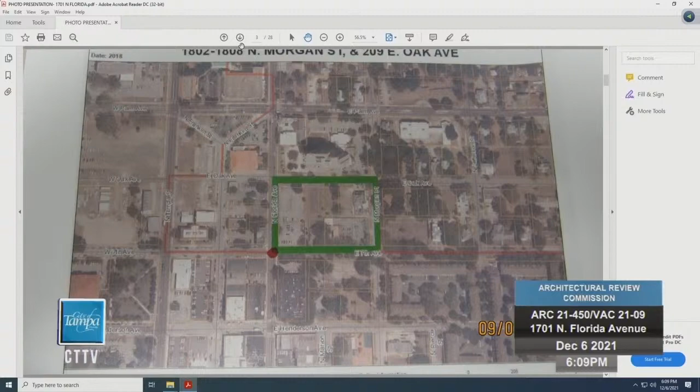I wanted to go to the surface of the alleys. There are some conditions associated when we get to the motion, that if it's a favorable motion, some of the historic material stays behind. So you see the granite curbing that flanks the alley, and you see the historic brick.

Just looking at the alley in different segments, some of it has not been kept as much as others, but the historical brick is there in parts, and then there's asphalt.

Bricks are protected by ordinance through City Council, and there's a provision I've stated in Chapter 22.305 that if the alley is to be vacated, the historic materials be returned to the City of Tampa.

At this time, that concludes the photo presentation and my introduction. These pictures will be here if you need to reference them anymore, and I believe the agent could address the board at this time.

Thank you, Ron. Good evening, everyone. My name is Tyler Hudson. My address is 400 North Ashley Drive, and I'm here on behalf of the applicant. Given the cause of this being continued as a tie vote, I'm very happy to see an odd number of you here this evening. I'm going to be extremely brief in this presentation.

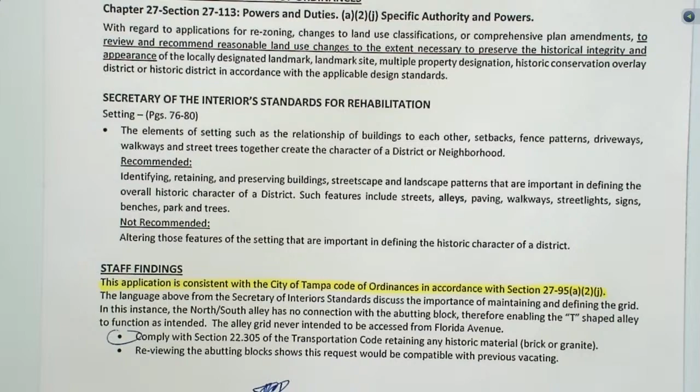Chapter 22, which is outside of the Land Development Code, is a transportation technical standard that has a process in place for bricks. On behalf of the applicant, in connection with any certificate of appropriateness that might come back to you for new construction on this property, we want to use as much of the bricks as possible. It's not totally up to us—it has to go through the process where they'd be removed, palletized, and given to the city, but it is our intent from a design perspective to use those as much as possible.

I would also note, let me get a better depiction. If you see the number 2 at 207 East Oak Avenue, there's an asphalt area there. The applicant is under contract with the City of Tampa to acquire that parcel. That contract has been approved by the Tampa City Council, and with that they are either under contract or have acquired the entire block. So that's part of the reason, given that there is unified—pending or existing—site control, to have the T-shaped alley vacated.

Last point—you see the red arrow, that's the block in question. The block immediately to the south, the Salvation Army office building on the right side of Florida Avenue as you drive north, had a similar T-shaped alley, really an identical configuration.

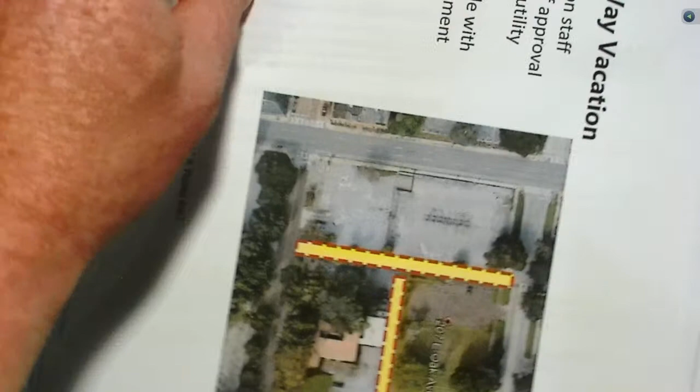I'm not sure that's actually what you intend for us to see. The one you had? No, the one you had on top. There you go. Yes, thank you. You wanted us to see the red lines, right? The red lines and the dotted yellow lines and arrow, so yes—a little bit more than I can do on screen.

But just for precedent value, again the southerly adjacent lot, the Salvation Army office building, is not in the historic district. Our parcel is on the actual border, but I'm just providing that for a fuller sense of context. I appreciate your time reviewing this presentation a second time, and I'm happy to answer any questions.

Thank you. Thank you.

Commissioners, Ron Vila, staff with Historic Preservation, to provide you guidance on the applicable standards you'll review this request with. This is Chapter 27-113, your duties and powers, subsection A-2-J, regarding applications for rezoning, land use change classifications, or comprehensive plan amendments: to review and recommend reasonable land use changes to the extent necessary to preserve historic integrity and appearance.

In reviewing the application, the immediate vicinity has been altered in a negative way, and the alleys cannot be brought back. This continuation of the alley does not provide a viable economic engine to move forward. Staff's findings are that this application is consistent with the Tampa City Code of Ordinances.

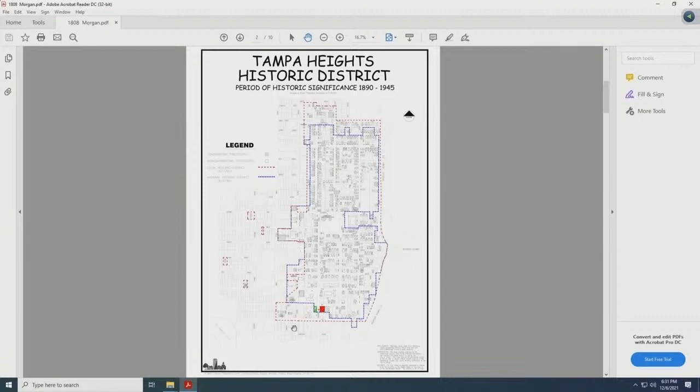The contributing structure making the site subject to the PD, or the move to the PD. Just a couple of different illustrations showing the same point, just to focus on the structure itself.

This is the front elevation, which is the north elevation. This is the east elevation and the front elevation, showing how they're addressing the accessibility at this time. This is looking at the front elevation, which is the north and western facade.

And moving around to the rear, and some different accessibility issues to meet code. This just shows the posting at the receiving site. So that concludes the photo presentation at this time.

Mr. Madsen can address the board.

Good evening. My name is Harvey Schonbrun, and I am the owner of 1808 North Morgan, where the building is now, as well as 301 East Oak, where we would like to move the building to. I just wanted to introduce myself to you and let you know that I am not an interloper. My history in this block, in this neighborhood, goes back 74 years, when I was born at the old St. Joe's Hospital across the street. And then when I was a little boy, my office building, not this building, but my office building at 1802 North Morgan, was my pediatrician's office, Dr. Philip Adler.

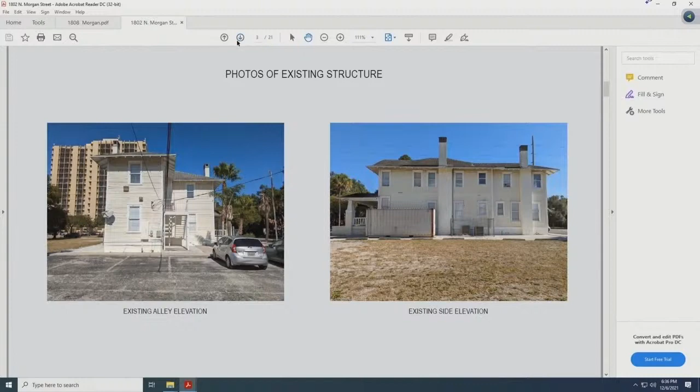Again, the existing alley elevation and the existing side elevation. That would be the side that, on your right, would now be facing Morgan if we kept the orientation the same. The relocation site is the Oak Avenue site. So in this aerial, that's the current location, and as you can see, it's the only house left on the block. We're proposing to relocate it just directly across the street to Oak Avenue, to this site.

The proposed development is not by us, so our group doesn't have any control of that existing development, but if the development does go through, this is the only structure that will be left in place, and we felt it would be an inappropriate scale for that location to remain there. Plus, as Harvey mentioned, he wants to be maintained in the neighborhood. He wants to preserve the house, so we feel it's best if we relocate it, and that he could occupy that space as his personal law offices in the neighborhood.

So this is kind of the orientation. We've taken the house, and the only exterior modifications we're going to do are ADA improvements to it. So as you saw, we're taking the house in one direction, and as we swing it over, we're going to rotate it 180 degrees.

So part of the rezoning, the PD, and the ARC application is that the receiving site is RM24, which does not allow for law offices. So we're asking for the PD to allow the client to occupy it as a law office, which the current facility is. The 1808 Morgan Street address is a PD and it is approved and actually used as a law office. So as we relocate the building, we want to bring that same use over to the new facility, or the new address.

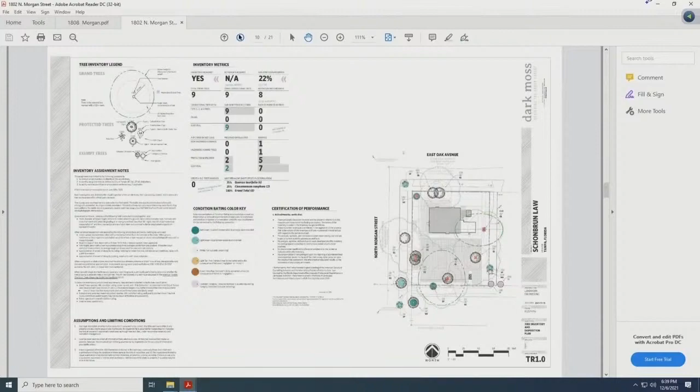And we're preserving as many trees on the site as possible. These are just some of the variations we've tried, just to give perspective on how we came up with the orientation and the pitfalls or problems with other orientations.

This was an example, one of the first ones, where we took the orientation of the building and just slid it over. As you can clearly see, at the corner, the intersection of Oak and Morgan, the building is no longer facing it. So the historic corner facade is not how it would be. We talked about having to build a porch to wrap around to make a new orientation, and it just didn't seem to fit.

With that orientation, it really limits our parking. We'd have to use the alley, and we just didn't get enough parking spaces. So we tried a couple of variations, moving the building forward, still not getting enough space for parking. Again, the biggest problem is the orientation, that the historic corner facade is just not facing the corner of East Oak Avenue and Morgan Street.

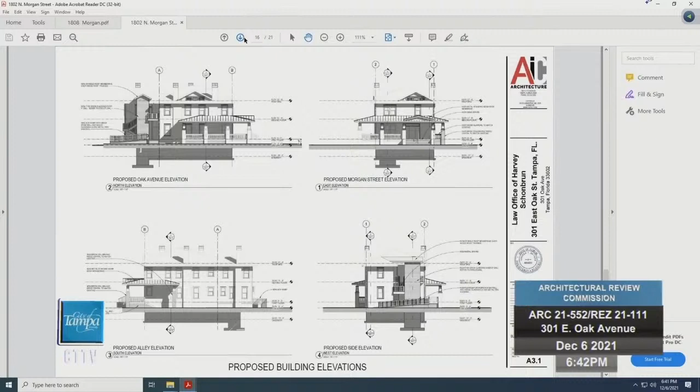I understand from the staff reports that the improvements to the site will have to be done under a separate ARC. But just so you know, we're proposing an elevator, an ADA ramp, and redoing the stairs for egress purposes.

These are the renderings we've done, and we've included the new development, which has already been approved. It's the Victorian townhomes on the back side of the alley, on 7th Avenue, which are 4-story townhomes. So our site, 301 Oak, we're trying to maintain the historic structure of it.

So this would be the new Oak Avenue elevation, which was the current Morgan Street elevation. This is the Morgan Street side—oh no, sorry, that's Oak Avenue. That's the corner intersection of it.

This is along Oak Avenue, looking at the elevator and the proposed ADA ramp. Part of it was that the original ADA access was in the front, on the porch. We didn't feel like that was appropriate, so we're trying to redesign it so that it's accessible, but not the first thing you see.

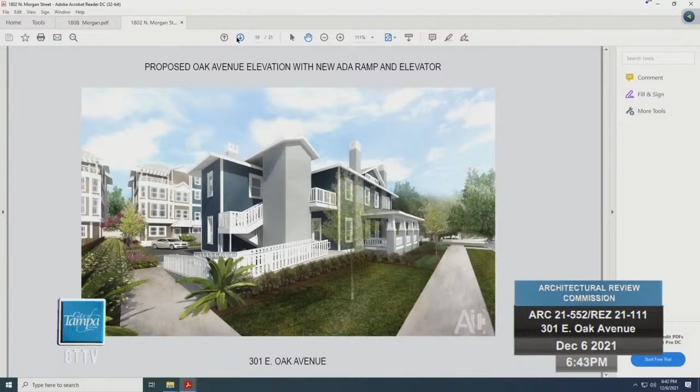And then the proposed interior of the parking. So that's again the townhouses to the south on 7th Avenue, and our proposed redevelopment of the site.

That's just the interior of where the ADA ramp is. We're proposing to keep all the materials the same, so the brick where we had vertical elements such as the fireplaces. But again, that's a separate ARC. So, that's it.

So at this time, I'd ask the agent if that concludes your joint presentation for the recommendation for the rezoning. Yes, so the rezoning is just because they work together. I want to reiterate, the relocation of the house is one, but the rezoning, they work together, so you have to have both at the same time. I even think in the report, the rezoning report says the relocation must come first before the ARC, or for the rezoning application.

So you've addressed every point that you needed to address for both? Yeah, you want me? I could go through each waiver if you want to go through the waiver applications for the REZ, but I mean they're very... Yes, typically we expect that to be, yeah. No problem. So there's 5 waivers for the application. Put the site plan up? For the site plan, yeah, yes. Put the site plan.

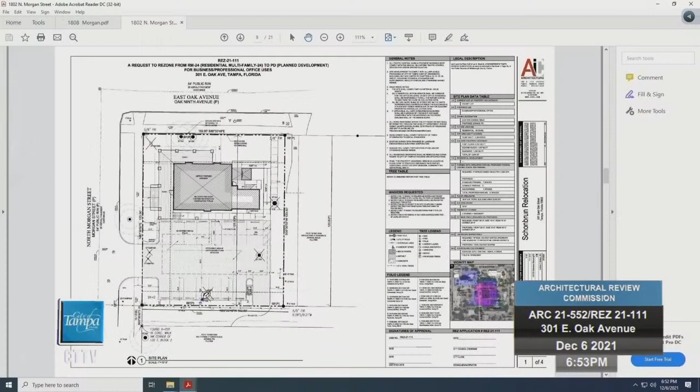So it's a C8? Yeah, so C9 is preservation, C8 is deemed hazardous, so he wanted it removed, because it was... I think we're talking about different trees. Which one, you're talking about this one right here? Number 2, it is tree number 2 on the south property line. Yeah, that's the one. That says it's a C9, in good shape with low failure potential.

That's what I would have to go with - I'm willing to save that tree, but that was not consistent with what he had instructed us, and that's why it was being removed. I'm happy to save the tree and reduce the parking, because the required parking is 17 spaces. That's not what the client actually needs, but that's just the city guidelines. When we spoke with the arborist - sorry, number 2, if you look at the report, is the hazardous laurel oak in fair condition. I might be reading it wrong, but that's on his second page. There's the number of grand trees: tree number 14, non-hazardous, and tree number 2, 33-inch hazardous. And that's why he's recommended to remove it.

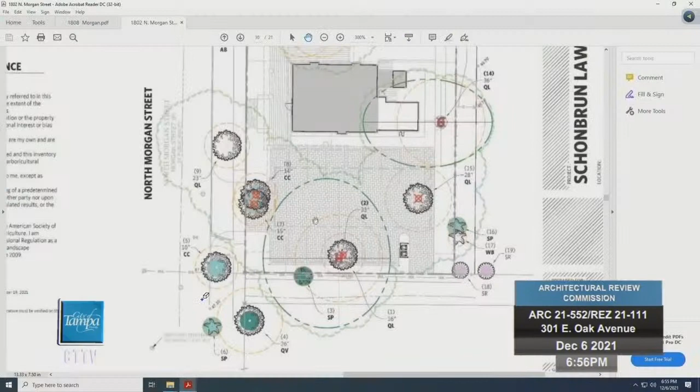Okay, so this tree is tree number 2. On page 2 of the report, that tree is the 33-inch hazardous oak. He calls it fair condition, but it has a hazardous rating of C9.

If the tree was in better condition we'd preserve it. That was a specific question we had with the arborist, because when we talked to the Civic Association, they asked us to preserve as many trees as possible, and we're willing to. But when we directly asked the arborist, his recommendation was that it's a hazardous tree and should be removed.

So to clarify, tree number 14 is the one deemed non-hazardous and could be saved. It could be saved, yeah, and that's part of the waiver. When we asked about that, his report said because of the foundations and close proximity, he didn't think the long-term longevity of the tree would be sustainable.

Again, it's based on the shape of the tree. He was okay with its removal as long as we pay into the tree fund. We prefer to save as many trees as possible, but relocating and then destroying it just didn't seem like a good idea. Thank you for your explanation, I understand the difference. I'm sorry about the confusion.

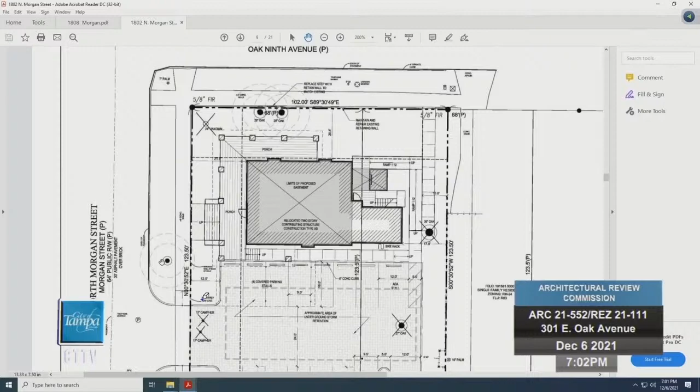That's it for me on the zoning in terms of questions. Any other questions regarding the rezoning request? Can staff tell us what the zonings are of the abutting properties?

Yeah, I could tell you that. Do you want around the perimeter, just the abutting properties? Because I've listed them on my site plan. I'm actually more concerned with the block you're moving to.

So the block that we're moving to, Site K, which is the townhouses, that's a PD. Site G is an RM24 zoning, and F is also, I believe, RM24 — those are the two adjacent parcels. Across the street on Oak, B and C, those two are actually commercial properties, CN zonings, so we'll be in line with commercial. B, C, and D are actually office PDs, so they'll match — when we move, our zoning will match the street across the way, just across Oak Avenue.

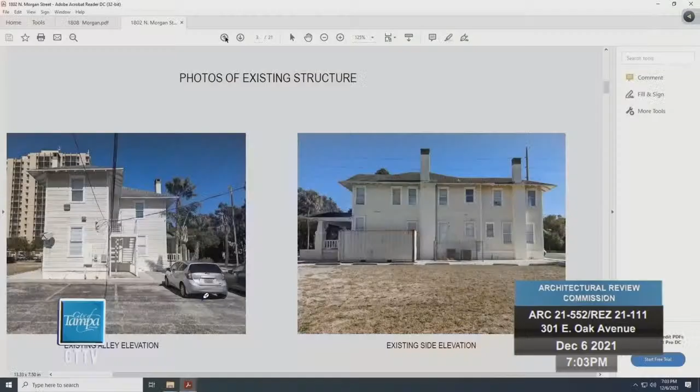Do you have any plans for signage on the site? There was a small monument sign that was part of the existing setup, and that's about the same scale of what we would be proposing. I'll go back and show you — there it is. So that's the existing signage, and I don't think we're going to have anything larger than that for the signage.

But where on the site would it be? It would be actually across the way on Morgan, because that's the front entrance. Can you indicate on your site plan? Yep, it would be right here. And it's exactly the opposite side on Morgan currently.

Any other questions for the applicant or staff regarding the rezoning request? One more question in regards to the tree replacement, paying into the fund — were any options looked at for actually adding in trees to the landscape?

What we've done is have it laser measured - these are the lines, the low voltage cable and distribution lines, and the TECO lines we'll have to relocate. We're negotiating with TECO to get a cost to move it underground from pole to pole. Not that complicated. That line is the transmission line.

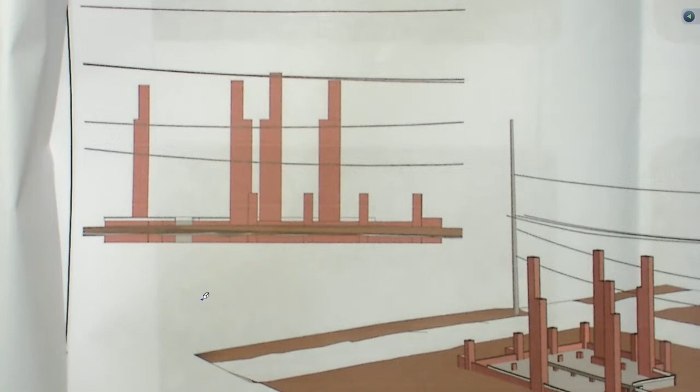Can you zoom out a little bit? We can't see all of that. That top line up on the very top is actually just part of the page. This line is the bottom line - there are 3 phases of power that come across, and the bottom line is the bottom phase.

In discussion, the laser measurers measured the highest point, which is the fireplaces on the house, so that's why those are represented like that. The house is only going to get lifted up about a foot to 18 inches. There are some curbs on the receiving site too - granite curbs, a sidewalk, and an 8-inch retaining wall - so we just have to lift the house up just enough to get it over to the site.

It shouldn't be that complicated because it's sitting 2'8" above grade right now, and when we land it, it'll be sitting 3'4" above grade - about 8 inches of difference from the original. So the character of the house when we relocate it will be almost the same, going from a 2'8" foundation to a 3'4" foundation. We had them measure it, and I'm going to rotate it.

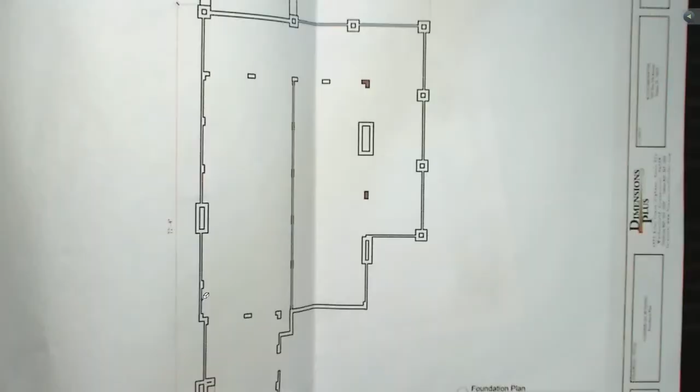So this is the stair foundation. This piece is the porch support, and the house are sitting on these piers. The indication of the red is where the laser couldn't actually find it, so those are actually just based on surrounding footers where they think it is.

When we get the house up, we'll actually know exactly where it is to relocate it. And again, the basement will follow this rectangle, and that's where the house will then sit on top of that particular foundation. We'll rebuild the foundation brick to match the brick where it was brick, and then the siding in the house we're going to restore. There's some, again, that's a separate ARC. There's a lot of water damage and termite damage that we have to repair.

So could you go through the points under the burden of proof that you attached to the material that we have in front of us? Yeah, so there's...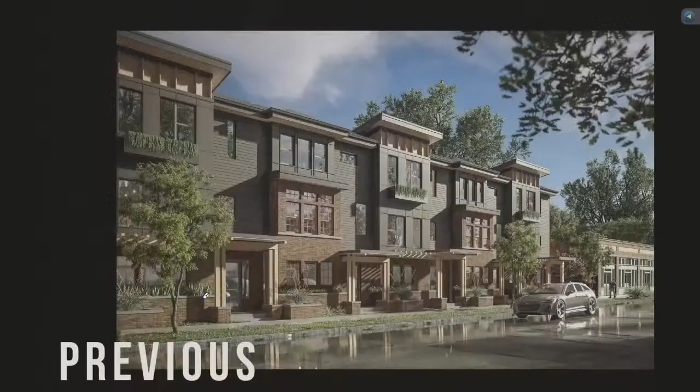Thank you, Commissioners, for your time this evening. I'd like to run through and provide a refresher, distilling our interpretation of the comments from our previous recommendation for rezoning. We touched on a few things that are relevant to the certificate of appropriateness approval.

Here we have the previous elevation along Oak. One of the issues was the setbacks at the porch level specifically, and also on this rendering, which is even further back, but we incorporated more front porches into the Oak elevation. We've also stepped back the entry facade and building envelope at both the first and second levels, and modified the roof line so it steps down more softly towards the rest of the neighborhood.

Here you can see the current elevation as it's been adjusted. We've incorporated a secondary sloped roof between the second and third levels to better reference and be in keeping with the 2- and 3-story structures adjacent along Oak and in the surrounding neighborhood.

You can see here we've got 3 porches; previously we were proposing 2. We thought the neighborhood association and adjacent property owners were really interested in that pedestrian-level engagement, so we tried to modify our unit splits to accommodate more porch area.

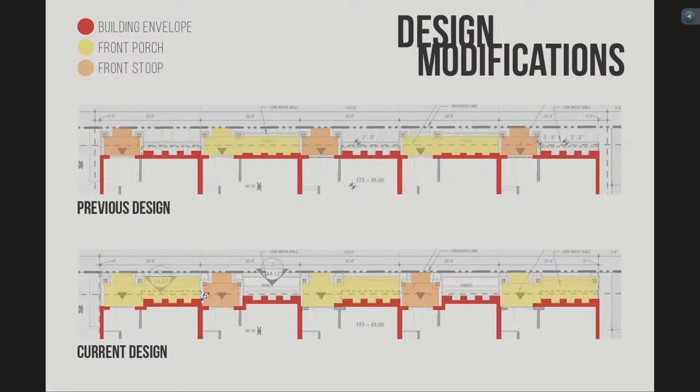Zooming in on the two different unit types along Oak, previous design at top, current at bottom: it was previously a 6'2" setback from the property line to the entrance and building envelope, with two total porches of 85 square feet each, for 170 total square feet of porch area.

With the current design, we've increased that setback to almost 8 feet at the entry and 7'4" at the envelope. With three porches, increasing the setback allowed porch size to grow to 107 square feet each, totaling 321 square feet of porch area along Oak, an 88% increase compared to our previous submission.

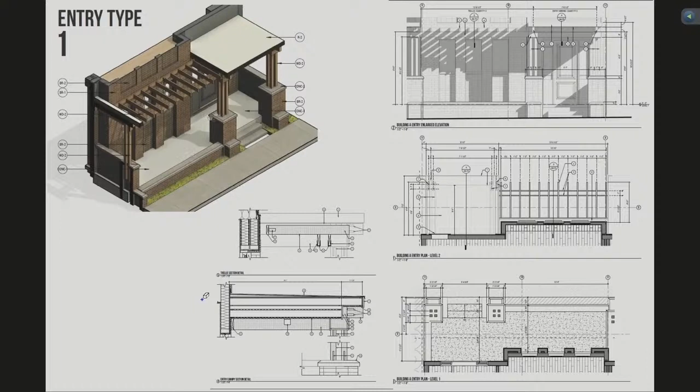More diagrams on those two types of entries: we have porches and non-porches. Where there would be a porch, we instead have a planter to allow for different unit types and a bit more green space along Oak. Here's that second type.

We can go back to see the different efforts made to adjust the setback at the second level and first level, then cap it with this sloped roof. This top roof was created as a mansard-type roof, but we increased the pitch to 12-12 so that from the elevation view you can understand it's a sloped roof, which also brings the soffit line down a bit more and helps it relate to the adjacent buildings.

Let's see the modified elevations.

We think this extra space at both the first and second level not only allows for a softer meeting with the pedestrian level, but also provides better facade undulation across the elevation, breaking up the mass even further than we had previously.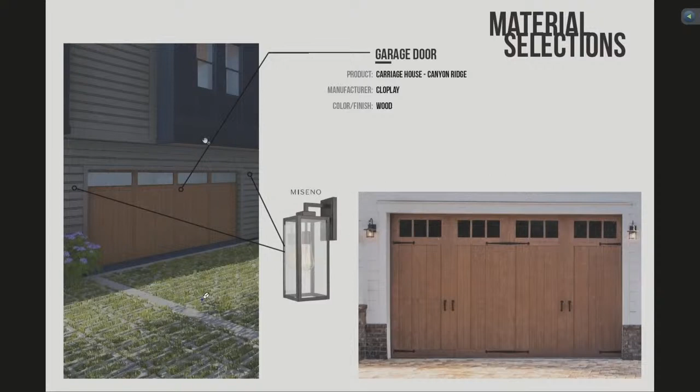In this interior motor court that we're proposing between the two buildings, we're looking at a turf block—an Aquastorm turf block with a gray finish and the ability to grow in the interstitial space. Throughout that entire motor court, we're currently sizing that for underground stormwater storage vaults. It looks like it's going to be pretty much the entire motor court housing these vaults, but this will be a good way to allow excess rain or water to percolate more quickly through.

So as we look at the three-dimensional view, this is looking west down Oak. We can see the currently unimproved alley that we will be improving. The motor court entrance is beyond.

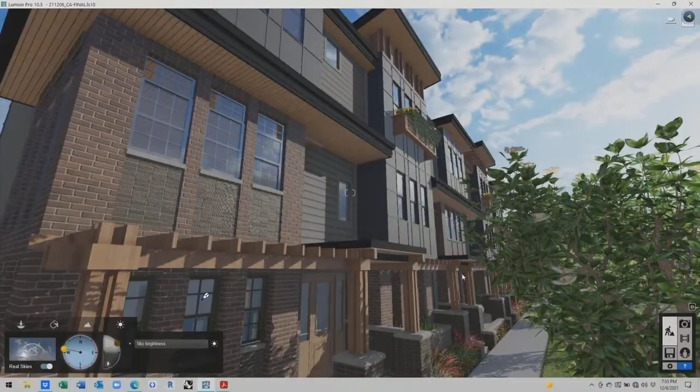We think that, especially from the pedestrian experience, having the facade step back particularly at the entrances on the first and second level allows for quite a bit of facade undulation, breaking it up into multiple unit types rather than one continuous building.

Here we can see the front porches along Oak, with landscaping and planter boxes every other unit.

Here we can see the building in relationship to the contributing structure to the west, and the softening of this roof line at both the second and third level, which we feel is an improvement from our previous proposal.

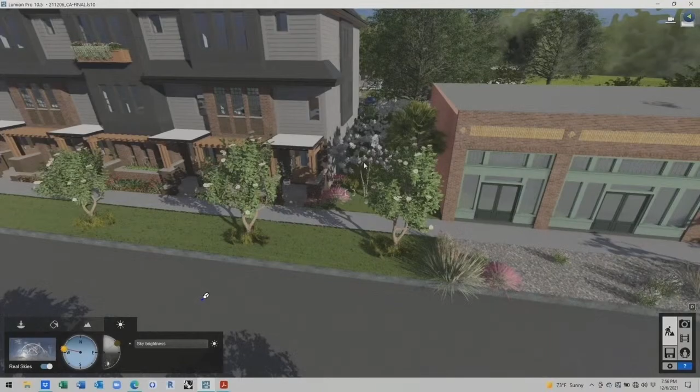We do have some landscape plan for this interstitial space between the two properties, along with, as Josh mentioned, 6 magnolias going along the right-of-way here.

As we move forward through the alley, we have a 15-foot alley on this side. However, there's a requirement for 20-foot fire access, so we have a Miami curb here and a pedestrian walkway, which is sufficient for the fire department to access the units.

As we come around into the motor court area, you can see we're planning on having this feel more like its own cul-de-sac and a private area for use when not occupied by vehicles. Rather than having the 2 units face away from one another, we can create an amenity of sorts along with mitigating the stormwater as much as possible.

Let's go up—each unit will have its own condensing unit on top, centrally located as much as possible so as not to be visible from the street level.

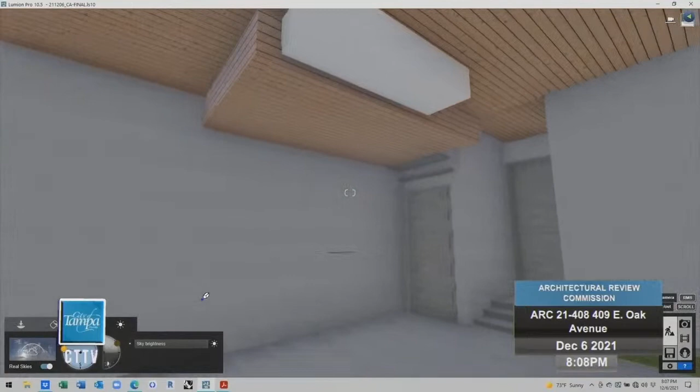Does this program go all the way around to the backside? It does. I don't know how much elevation, how developed we've made the model to that point. It's the only elevation you didn't show us, so I was just curious.

Let's see if we can get over there. We don't believe we put landscape back there. We actually discussed in the prior hearing that there weren't a lot of resolved elevations for the rear components, so it would be great to see those.

It's similar in aesthetic as this building. We have slight little landscape that needs to be applied here, but we're using the similar materiality and facade articulation as we are in the rest of the project, along with modifying the roof types and continuing this greater sloped mansard roof around the corners.

So I actually do have a question about your roof slopes. Why the 12 and 12? I understand the view, but what got you to the 12 and 12? Because it's a dramatic shift from the slope you had before.

The intent was to have the perceived roof line be dropped down specifically at the edges and the corners in order to create habitable living space. However, we weren't able to have a lower sloped roof. We thought this would be a little bit more in keeping with the surrounding neighborhood and existing hip and gabled roof structures. So you're actually using the lower components of that slope to give you the head height in the occupied space? Yes.

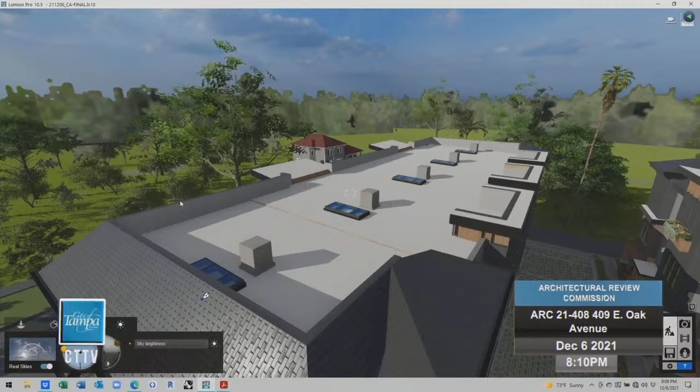What's your current parapet height? 37'2" above grade. No, but what is your parapet from the roof slab, at the roof deck? At the front, I could guess at it, or I could look at a drawing. I'm guessing it's probably 3'2". Okay, less than 5, more than 2.5.

Have you sized your condensing units yet? We have not. We have not gotten to the energy calc phase yet.

Can you show that roof plan again, or just go to that view in the model again? Based on the size of these units, they're probably gonna be somewhere around 3.5 ton. Yeah, not very big.

Going back to the roof slopes, what got you to the reverse slope on the projections? They're just kind of an oddity. I think it's about differentiation and creating separate unit types and feels along the facade.

It gets a little bit staccato and repetitive in nature if we were to maintain the same aesthetic. I think that if it were a simple parapet here, if we forego having sloped roofs all the way across and just do a simple parapet, that's out of the aesthetic of that craftsman style. So we wanted to give it at least a small soffit, but just a slight slope to drain back to the roof, and hopefully give it some extra intrigue along the elevation.

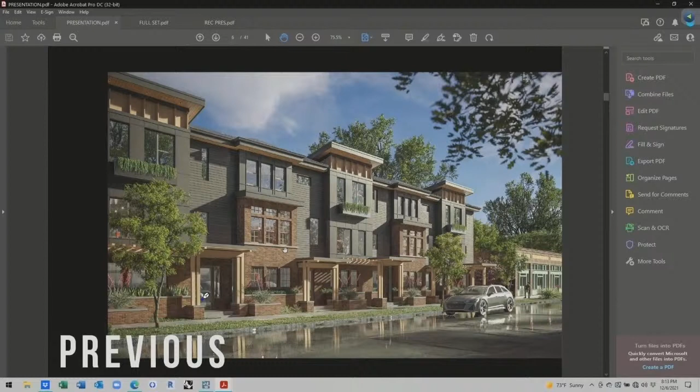I think you're going in the right direction from the prior design to what you're showing now, trying to make more of that rhythm happen and the push-pull happen both vertically and horizontally. But I think what I like about the prior one, and it goes back to your roof slope change, is that now they're fighting—I agree they're fighting because there's not enough differentiation. They're so close to being at similar elevation when you look at it from a perspective, and that's what you're going to see. You're not going to see the full elevation.

We don't see the world in elevations. They're so close now. That 12 and 12 pitch is doing you less good on the upper story than the lower slope you had before, because it allowed those three lower projections and the two taller projections to have more relief.

And I know you need the head height for your spaces. I have a different read than that—I think that if they were all at a higher elevation, there's less undulation. Maybe I'm not hearing you correctly, but I'm not saying move your eaves.

To me, the three lower ones and the two taller ones—the reverse slope ones—are so close in elevation, and because you've also picked that higher slope which kicked it up to that 37, the larger roof in the background, now they're all competing for the same elevation. There was more play elevationally, vertically, with the lower slope in the main roof. I see, that's what I'm saying. And I also feel like the reverse slope is fighting that a little bit right now because of that.

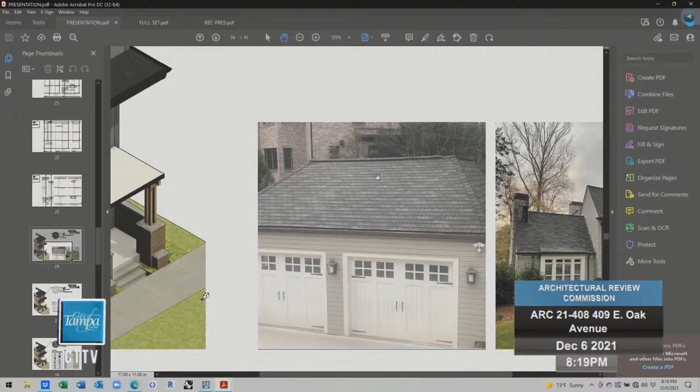And what's the actual color, the really dark color where you have that? We actually don't consider color in our debate. We don't, okay. I'd love to have that debate, but we can't.

Can we go to the rear facade just one more time? I'm more concerned with the back building where we're facing other residents. Has there been any thought on this rear facade of giving it some sort of defining character, a little more so? I realize it's the rear, but I think we could use the brackets to support these slight cantilevers here and also at the roof line.

Why is it so blank in the siding area? Is that a stair in there? There's a stair here in the corner. I think the right answer is that it didn't get translated to the three-dimensional model. Our elevations actually probably have glazing here. So do you have the elevations in the drawing? Yeah, sorry, fine.

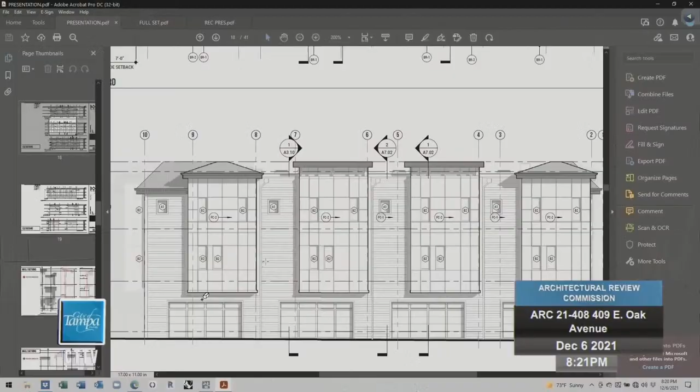There should be a secondary opening right here. There's a bathroom adjacent to, off the kitchen at each level here. So that's the second level, or that's the third level, I'm sorry. There should be a window here.

Any other questions? Just out of curiosity, could you zoom all the way out like that? Do you have a floor plan of your upper level at this scale, the third level? Would you like me to zoom in?

One of the things that I recall as being a quirk in looking at townhouses in older cities in the Northeast is in a whole row of townhouses, the end units were always the ones that were coveted, because the end walls themselves were articulated, had more windows, and you had a greater degree of daylight conditions within the unit. Specifically, the majority of those dwelling areas, the living rooms, the living areas of the unit, were always placed on those outside walls to take advantage of that illumination.

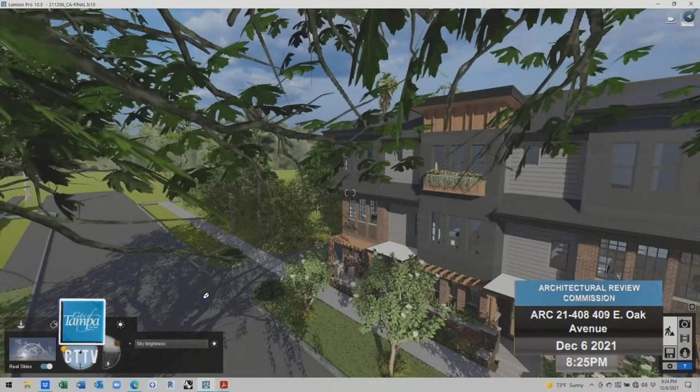The back end of it, the same? It's not, the back just didn't get fully modeled yet. So could you show us on the second and third levels on that rear corner, how might you add some glazing, just real quick?

I think what we could do here is these units, in terms of plan, are somewhat bisected across the garage demising wall on the ground floor, and that language continues all the way up. So there's opportunity to actually mirror what's shown here on this plan and maybe pivot it so that the kitchen could have some clerestories above it if it were on the other side, letting that be kind of its own statement.

And that could happen, and this one already has that condition. And at the third level, the same is true, where we could figure out how to reorient this one so that the bedroom finds itself on that corner and gets better light. We could just switch those two without much issue. Same goes for here.

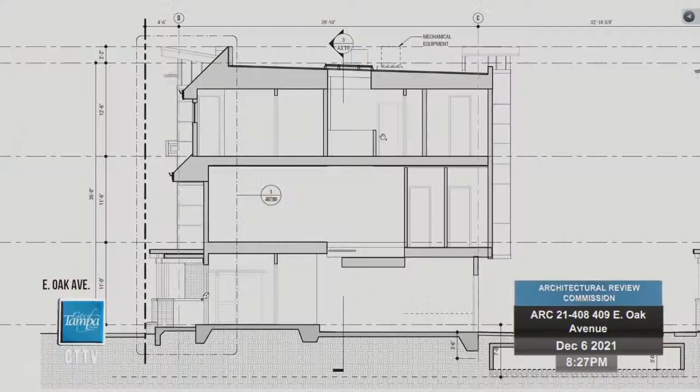We've tried to create with this the skylight, this vertical penetration. There's an opening here, wasn't drawn correctly, but we've created this vertical void that extends all the way into the dining and living room area, that allows natural light to come into that central corridor, which is always most difficult to make feel natural. This is our way of addressing that typical issue in townhouses.

Let's leave this section up right now. I know my fellow commissioners have voiced some concerns about roof slopes, the complication, brackets, all this sort of materiality that's involved with that. Part of it being a point of, you're in a historic district, and that's the nature of the craftsman-type buildings that are there.

But I do wish to point out, in furtherance of their discussion, you all went through a lot of trouble and care in developing your framework for your flying work over your porches and through those bump outs, those bays, how you support them, how you articulate that. That kind of articulation is missing at your other overhangs, such as on the backside over the garage doors, or at the overhangs of your roofs, or the flies of your roofs.

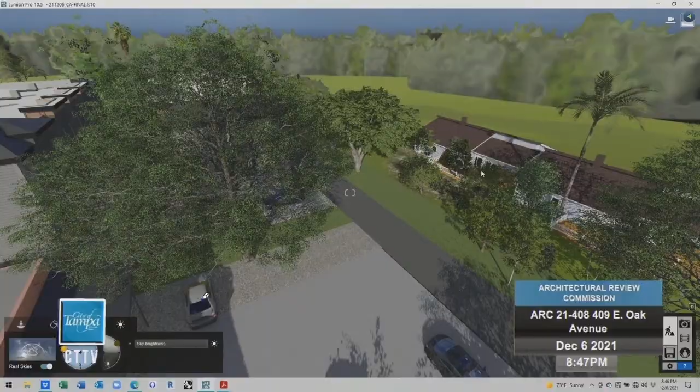I think a lot of the points that have been touched on are valid. I want to reiterate that this is truly—I mean, it may look like these are rears of houses as shown in this depiction, but this is an alley, and this is a rear fronting building. I agree there are some more glazing opportunities we can accommodate by shifting the unit plans, but I wouldn't want to get so ornate that it sets a precedent that alleys need to have quite articulated facades as right-of-ways. That being said, if we can come to a set of conditions, we are prepared to work with staff, if Ron's okay with that, utilizing some of the detailing we've shown in other portions.

We can take those same aesthetic moves and apply them a little more carefully and thoroughly, which I agree is apparent we have not done yet. I think it's a matter of putting in the effort to really flesh out those facades to the same degree of care we've shown the others—not the same degree of articulation perhaps, but the same degree of care and understanding of how the facade relates to the interior units and how it's visible from the alleyways and from the street front.

If we can set conditions like that, and if we had a 3 or 4 foot room to wiggle on that roof line articulation, I think we can come to something in keeping with the comments we've heard today, that provides a little more delineation between those separate roof types. Beyond that, if those are the conditions you're considering, I think there's ample opportunity to address them given the aesthetic precedent we've set forth in other areas of the building. I think it would be less of a burden on staff if we're just taking that same rigor from the areas we've spent more time on and applying it to those less forgotten about areas, if that's pleasing to you all.

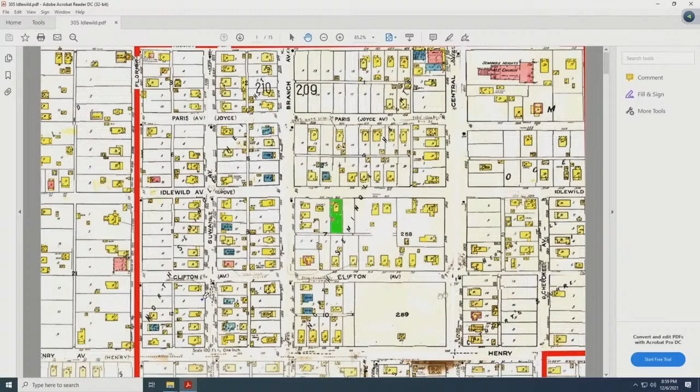Moving to the photo presentation, starting with a Sanborn map. Property in question is in the shaded green area. It faces Idlewild and has an interior lot presence. It's on the corner of Idlewild and Branch as a reference point, and you have Central to the east. Overhead, once again, the house faces Idlewild, with Branch to the west and Central to the east.

The parcel is rather shallow in the front with a deep presence. Looking at the Craftsman style home, it's a one-story house that has a partial front porch with a porte cochere on the west side. Looking at the east elevation and the front facade, and the abutting neighbor to the east. Going back to the subject site, looking at the porte cochere and that west elevation, and the property to the west, abutting.

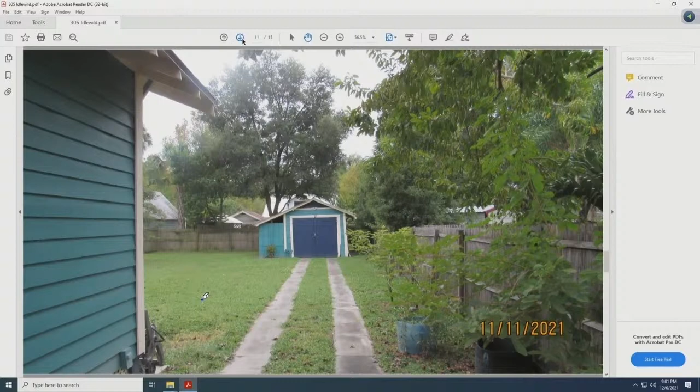Some street shots, here and here, this is to the west. And then looking at some historic fabric in the immediate vicinity as well. Going back to the subject site, looking through the porte cochere down the ribbon drive to the one-story accessory structure. Going to the rear of the subject site, it has a double gable, and another perspective of the rear elevation. Focusing on the detached accessory structure, and just a little closer. That concludes the photo presentation.

At this time, Mr. Dobbs will address the board, and he has been sworn. So this is the, okay, now I can do it, okay. Thank you, sorry about that.

Good evening, my name is Alan Dobbs, 5502 North Cherokee Avenue. I have been sworn. My clients who have owned this small 2-1 bungalow for a while want to add a master suite. They've done a lot of improvements to the property since they bought it, and so they just want to add a master suite.

Part of that too is they really have no covered outdoor living space in the back, so a rear porch is also what they're wanting to do. I'm going to go to the site plan. North is up on this.

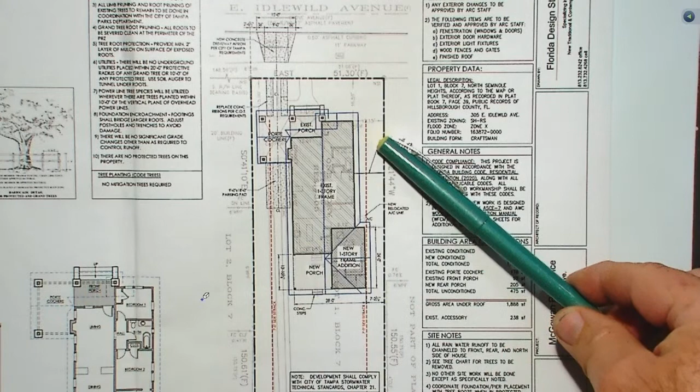We couldn't do an addition here, so the addition obviously just goes off the back, and as you can see on this side, we had a little bit of room to bump out, so we bumped out on the side. This dark shaded area is the master bedroom addition, and then a really large porch.

A couple other things with the site: there's really no trees within 20 feet, so there's no restrictions really on trees. And then as far as Secretary of Interior standards, by doing an addition on the back, it's inconspicuous. It's minimal modification to the existing structure, and it basically maintains the historic pattern of the neighborhood.

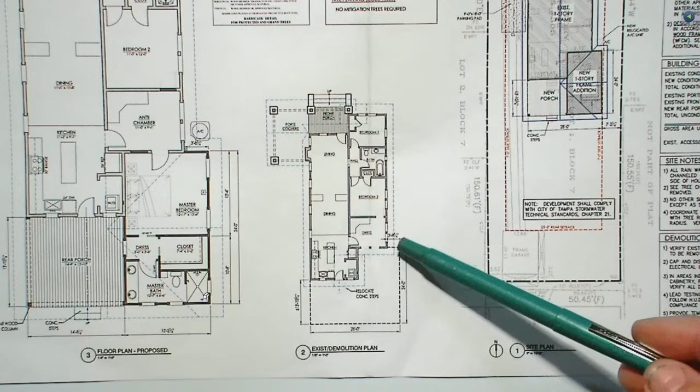The existing building has two bedrooms. This was like an old porch that's being used as a dressing area currently. This is where their bedroom is. They've already redone this whole area here, and so this outline area is sort of the extent of the addition. And then you can see this in a little bit more detail.

Here you have the master bedroom, and they wanted the bathroom area here. Just all spaces that are in proportion to the house, nothing too big, but functional. And then a large rear porch.

The building form was a little bit challenging because it has a simple gable that transitions down to a smaller gable in the back. So what we did with this addition, we created a side-facing gable, and you'll see how that works in the elevations.

Sorry, one other staff comment I forgot to mention is the air conditioning unit is right here, and screening was one of the comments they had. There's actually an existing fence here, so you don't see it from the right of way. I think you probably saw those in the photo presentation that Ron made.

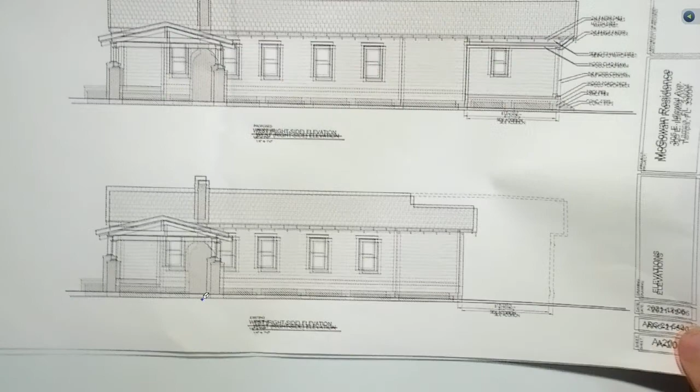Since everything's in the rear, the existing front elevation is like that, and then what you see is sort of an outline, and that's way far back on there. And then on the side, this is the vehicular side, where you see the most dramatic change, which is basically—this is where the kitchen is, so we aren't doing anything in this area.

Then this is where the porch is, and we're doing a band here at the beam. There's a lot of different ways the bottom of the beams are treated on the bungalows in Seminole Heights. Some just have siding all the way down to a 3/4 inch horizontal board at the bottom, and then sometimes there's banding that sort of matches the head of the window casing. So that's what we're doing.

You can see the house sits on masonry piers, and the siding comes down quite low because you have the floor joist sitting on top of a sill beam, but at the porch we don't have that, so the foundation enclosure is a little bit larger at the porch. We went with different column configurations and patterns, but we decided ultimately to go with one simple column—an 8x8 nominal column on the corner. There's existing precast concrete steps, so we're just going to relocate those.

The existing rear elevation is right here, so you just have that simple door in the back, and then that's where that dressing room is. And so with the addition, we have the gable, and then the side-facing gable here. We thought about doing a gable on this side, but we wanted to keep it very simple and clean.

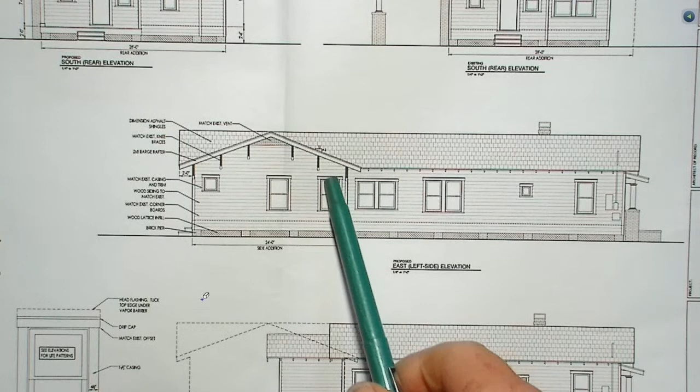They're a little bit different, but we're going to maybe replicate what is existing there. And then on the side, same thing, the existing elevations here, this steps back here. This is where we're doing the addition, and then the side-facing gable here. And again, the brackets, the windows are similar, but larger because we have to meet egress in the bedroom, and then a small window in the bathroom there.

The materials are basically beveled lap siding that will match the existing. Foundation and screen enclosure between the masonry piers, which will have a brick finish, and you'll see that in the wall section detail. The casing trim around the windows will match the existing. Since it is a contributing structure, the windows will be wood. And then we're doing a dimensional asphalt shingle on the roof.

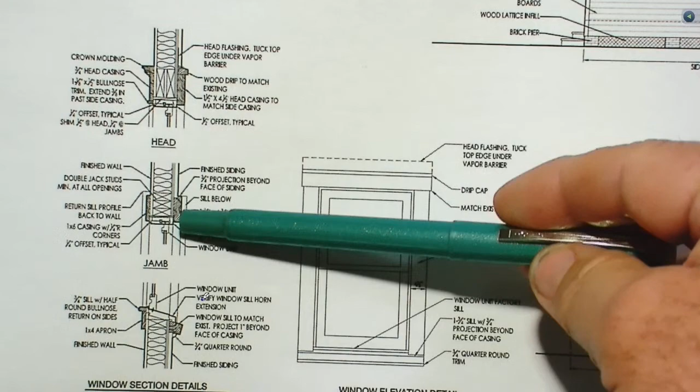The window details are pretty typical as far as the heavy sill with the little quarter round at the bottom as a transition piece between the siding and the sill. I can maybe zoom in on this a little bit. And then on the jamb, full 1.5 inches, so you have proper profile panning, or the face of the side casing sticks out 1/2 inch beyond the face of the siding. And then on the head, just the same profile member across the head, but then we have the extra drip cap and flashing over the window.

I just move this to keep it simple. So the porch, actually I'm going to do the wall section first. So the porch has masonry piers with a thin brick veneer over the masonry pier, and then we have the siding comes all the way down low, and then we have 2x4 frame wall construction with wood siding, bevel lap siding, as I mentioned before.

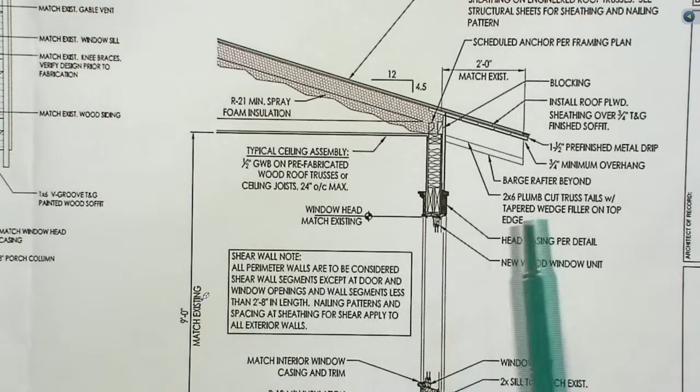The window details, we talked about those. And then a very important detail on these kind of bungalows is the eave condition. At the gable ends, typically that member is one member larger, or the barge rafter or fly rafter, and then the rafter tails are 2x6, and then there's 3/4 inch V-groove, tongue and groove with finished side down, and then 1/2 inch plywood go over all that, and then of course you have to have a drip right there.

And then the porch, similar sort of detail with the foundation enclosure and a wood porch deck, a simple square column, 8-inch nominal square that has a little, just a very simple base and cap. And then, as I mentioned before, how the beam is trimmed out, and then there'll be siding on either side that will go all the way up to this gable end vent that has the sill that matches the window. And then you kind of see these brackets on the gable end, which you saw in the elevation.

There's only one exterior door, and it's a French door, but because it's an exterior door, I've presented this one to the board before on a lot of projects. It's a great door because it's so simple, and it has a very slight grain to it, and then the glass stop is very similar to the historic doors. And it's not wood, so it won't warp and rot.

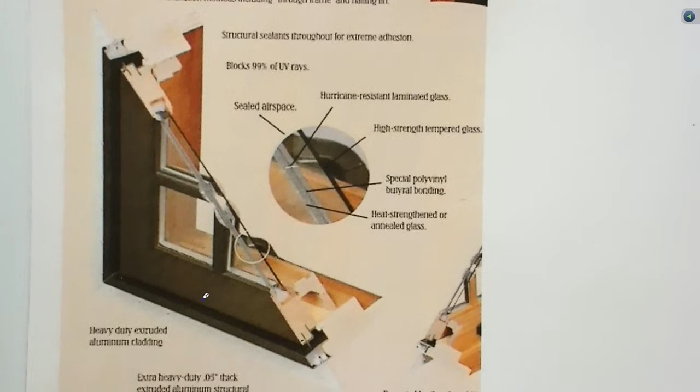The windows are a Sierra Pacific. I didn't bring a window sample, but it's just a standard wood window that Sierra Pacific makes. I've presented this window to this board in the past. Important details are the stile and rail, and then the muntin profiles, but we don't have any divided lights in this project.

Then the roof shingles, currently they have dimensional asphalt shingles, but we're going to have the whole roof replaced, so these are kind of a heavy dimension asphalt shingle, Timberline HD series.

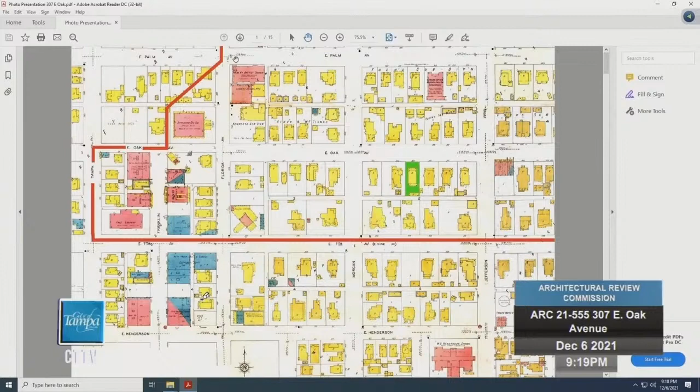And one more with Mr. Dobbs. Good evening, Commissioners. Ron Vila, staff with Historic Preservation. Our last case this evening is ARC 21-555 for the address of 307 East Oak Avenue. This is in the Tampa Heights Historic District. The primary structure dates back to 1917 and is contributing. As I go through the photo presentation, you'll probably remember this house came forward - Mr. Dobbs was here a couple months ago to show a rear addition to the primary structure. This request this evening is for a certificate of appropriateness for a detached accessory structure with site improvements. The current zoning classification is RM24, which allows up to a 750 square foot accessory structure, meeting setbacks, which will be indicated on the site plan he presents this evening. Moving to the photos, starting with the Sanborn map - this is also an interior lot, on Oak Avenue, which had a lot of action this evening.

To the west, we have Morgan. To the east, you have Jefferson. There is an alley that runs to the rear of the property.

On the Sanborn map, it does illustrate that there was an accessory structure there. There currently is none there, and that's why he's proposing one this evening.

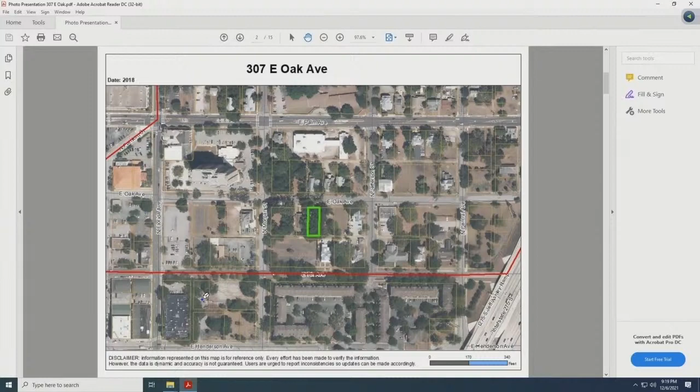Looking from above, you see some of the canopies and the site coverage with the vegetation, but it does indicate that the alley is still open, and you have Morgan on the west, Jefferson on the east, and Oak Avenue as the primary street. Looking at the front facade, and just walking you around, you'll get some cues off of the primary structure that will translate to the accessory structure.

Just looking at the foundation here, that's obviously not original. Looking at the height from grade of the house, just like to show some of the difference varieties as you look at many homes throughout all of our historic districts.

The front porch was enclosed, but you still see the period columns that were here and the different profile of exposure of the siding, from the enclosed porch to the original.

Very large house. Back in the day, it was a prominent house. You see some of the patterns of the windows. Through the discussions of other homes, we talk about the importance of windows, and you're absolutely correct. Prior to the mechanical systems, the windows were aesthetic, interior and exterior, and then provided a function for quality of life in Florida.

This is a non-contributing structure that is on the west side of the property. Just going back to the property in question. Looking at the front porch again.

Property abutting is vacant. This is the rear facade of the primary structure. This is the lower portion. Looking above, which would have been the sleeping porch, as we talked about the importance of the windows and quality of life. And how it looks today, and some of the demise of the structure that's going to be rehabilitated through this process. And just focusing again on the lower section of the rear elevation.

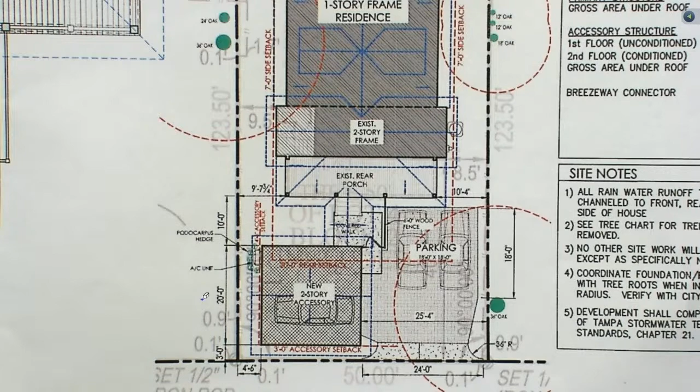Transportation has a requirement for vehicular entrance setback of 18 feet. So if we did that, that wouldn't work because we couldn't pull in, because the building would have to be too far off the alley. So we did a side entry garage, and these are actually fairly common, especially in Seminole Heights, but I think there's a few in Tampa Heights and Hyde Park. So that having that vehicular entrance on the side allows you to have the building justified to the west side and to the south side here.

3 feet on the public right-of-way, but a little bit more than 3 feet because the building code does not allow any combustible material less than 2 feet from the property line. So that usually ends up being like 4.5 feet, and so we're 4.5 feet here.

We have a little apron here, and we do have it scored just in the middle, keep it simple. But then we're doing pavers here. It was a little bit of a trade-off because when you're turning hard on pavers, like to go into a garage, they tend to migrate. But we want to use pavers because of the tree.

So most of the parking will probably be these two spaces here, but we also have an additional space inside the garage. We wanted to provide 2 spaces out here because I think everybody knows most people use their garage for things other than parking cars a lot of times. So, and also if they ever wanted to do an accessory dwelling unit here as a special use, they would have the ability to have an additional parking space, which is required. The building is 20 by 20.

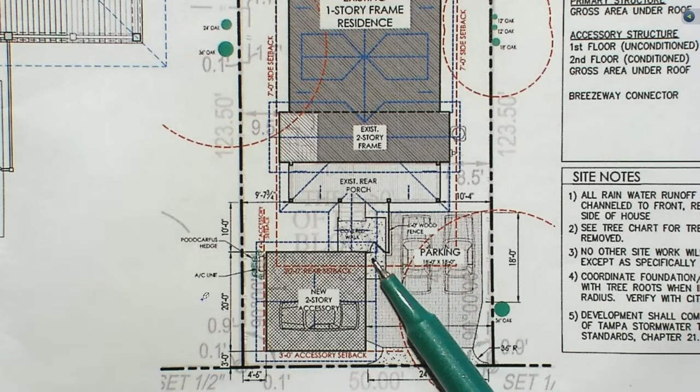It was really not, we didn't have enough room to do a 2-car garage, so that's why we came up with the configuration that we did with 2 out and 1 in. There's also a covered connector right here, which you'll see in the elevations. We aren't addressing any fencing on this property except for some fencing that runs from this column over to here with the gate, and then a concrete walk here.

The floor plans, just to give you an idea of the elevations, let me zoom out a little bit. So this is the porch that was previously approved. We're basically lining up the corner of this building with this column. So we're lining up this column with this edge of the breezeway, and then the width is this right here, which is less than 7 feet, which is the maximum allowed by code.

A lot of doors in this area, but it was done that way to provide flexibility so that you could go from the house right inside and up the stairs. Or if you're parked out here, you can go in and up the stairs. Or if you park in the garage, you can go through here and into the house. And it's pretty much a straight shot upstairs and around. You can see there's plenty of room around the car for storage. And then the second floor is basically just an open space.

I know land development is very sensitive to people turning these into apartments illegally, so we're going to have a big note on here, no cooking facilities. It's just like a guest house for now, but it's just a standard full-size bathroom and a little sink and a refrigerator. And the placement of the windows, which you'll see in the elevations, we don't have any on the first floor on these 2 sides, primarily for privacy for this neighbor, but also the alley here for security. But as you can see up here, we have them on all sides.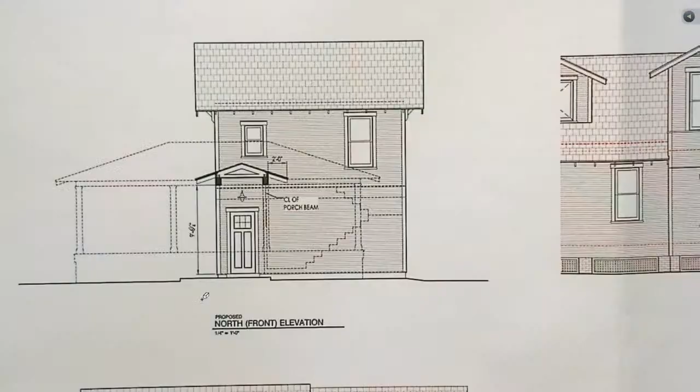And then here you can see the connector, which is set at the same height as the fascia and beam height as the porch. So these dashed lines show the foreground of the porch and then the connector, and I have a detail of that. And then a small window in the bathroom, because we also have this roof conflict here, so it made sense to have a smaller window there. And then a larger window in the stairwell, which I just realized I don't have that in the plan, so I'll correct that.

And then this shows the building in the context of the house. We're a little concerned about the height here, but it's only a modest 2-story building, and this is a 2-story, so that's just going to happen. But you can see how the porch and the breezeway, those align.

And then on the west side, facing the neighbor, you have just the 2 windows here. So the casing around the windows is going to be the same as the house, the primary structure, although we're not going to do any divided lights. We're going to keep it - if you recall, the house on the sleeping porch had 2 over 2. We're just going to keep 1 over 1.

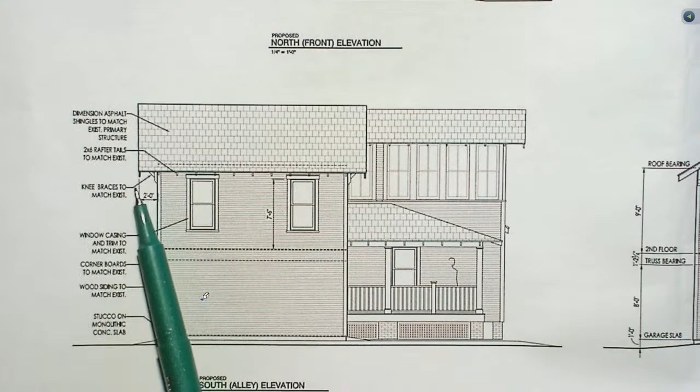Going to have corner boards, and then siding that will match the house, and then the rafter tails, and then the little knee braces - I have some details of those. The elevation, south elevation of this, you can again see it in context of the house. Garage door, carriage house type garage door, and then a person door there. And then again, smaller window in the bathroom, and then a pair of windows there lined up with the garage.

And then on the gable end, initially I didn't have anything. I just had these 3 brackets, but it looked a little empty, so I thought, well, maybe what we do is just replicate what's on the main house with the sort of the ABA rhythm of the gable end vent and window.

I'm just going to move this. So the structure of the garage is just a monolithic slab footing, 2x4 frame walls, a 14-inch floor structure, and then the roof will be 2x6 tails on the trusses with 3/4-inch V-groove, tongue and groove, finished side down with 1/2-inch plywood on top, plumb cut rafter tails with a 2-foot minimum overhang there, and then I'll talk about the window details in a minute.

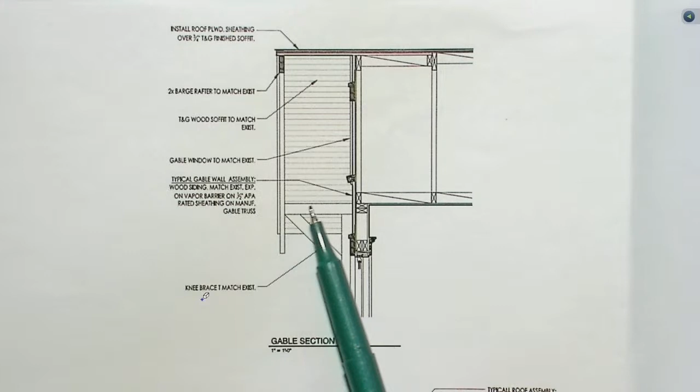The gable end has the barge rafter, and a knee brace similar to the existing house. This is a section through the gable end window, and a detail through the connector roof, which is basically a 3/4-inch wrapped beam, tongue and groove ceiling with a bed mold, about a 2-inch bed mold molding.

The window details are similar to the previous project. You have the heavy large sill with a little quarter round underneath, and the head has a full 1.5 inch with the drip cap, plus a full 1.5 inch side casing, with the sill visible below.

For the site materials, the material for the brick in the driveway is a simple basket weave with a border, red type brick. For the fence, something a little nicer than just board on board with the dog ear - thought maybe have a little more finished fence with 6x6 posts.

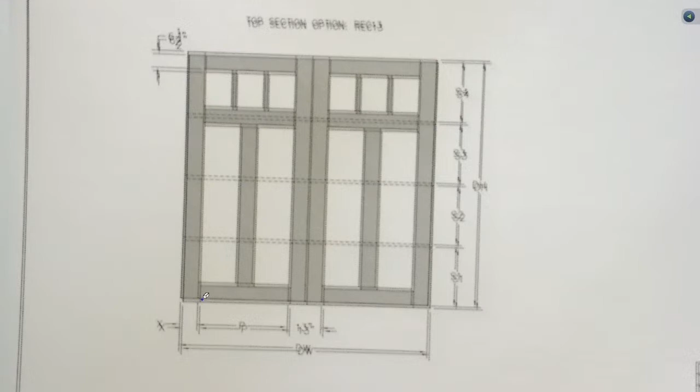The garage door is just a Clopay, Canyon Ridge series, similar to the door but with 3 lights over 2 panels, and it's a 9-foot door this way by 7 foot this way.

We basically have 2 types of exterior lights. One goes over the person doors to the garage, but it was too small in scale to go over the garage door. So for the garage door, we're doing a gooseneck type light, which creates a nice parabolic light pattern on the garage door.

The shingles we're using on the house are dimensional asphalt shingles, and we're using the same shingles on the garage.

I wanted to point out the siding profiles - these are actually standard profiles from the Southern Pine Inspection Bureau. This is basically a 1x6 that looks like double lap siding, which is what the main house has on it. In the soffits, it's this profile, not beadboard, but like a double sort of V.

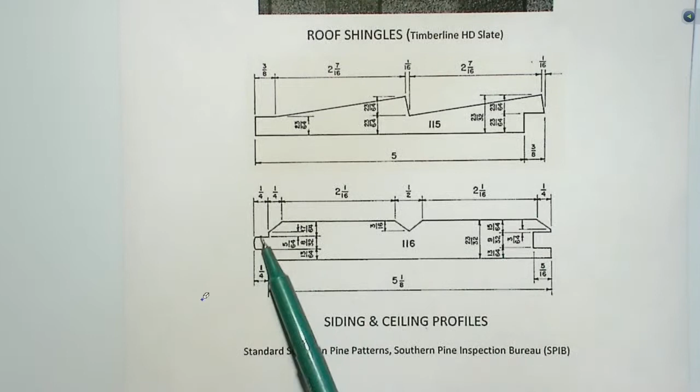For this building, rather than using wood windows, because that's always a big cost concern for clients, we're going to use the Sierra Pacific H3. It has a very historic type profile to the window and sashes, and these have typically been allowed in the historic districts of Seminole Heights and Tampa Heights on previous projects.

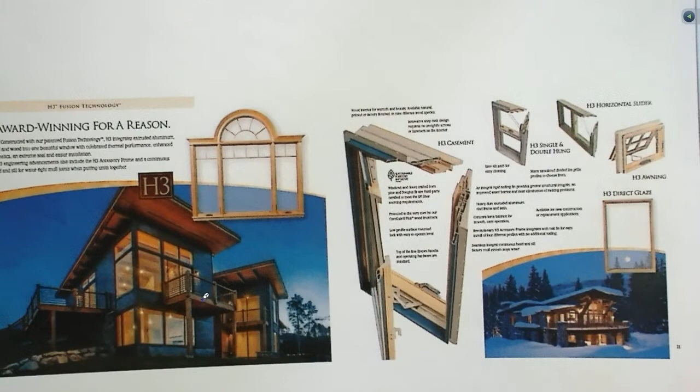So before I conclude my presentation, I'm going to see if my client wants to come up and say a few words about this project.

There's the microphone. Perfect. I just want to take a couple seconds to introduce myself. My name is David Sousa, I'm one of the owners. I want to thank the committee and the staff for the support we have received so far in this project. We have a lot in our hands, but we're very excited to be part of this historic community, and we thank you for the support so far. As my neighbor said earlier, Mr. Schonbrun and Ms. Gross, our project pivots around preserving this house, and that's an important part for the neighborhood. I think Alan did a great job with the project and explaining in detail the interest we have for this structure in terms of functionality, and also to use the alley that is there. I think it will positively impact the parking density also in Oak, and I think that's a key part in our project. So we thank you for your support in advance, and you'll see me here in every presentation going forward, so thank you for your time. Thank you.

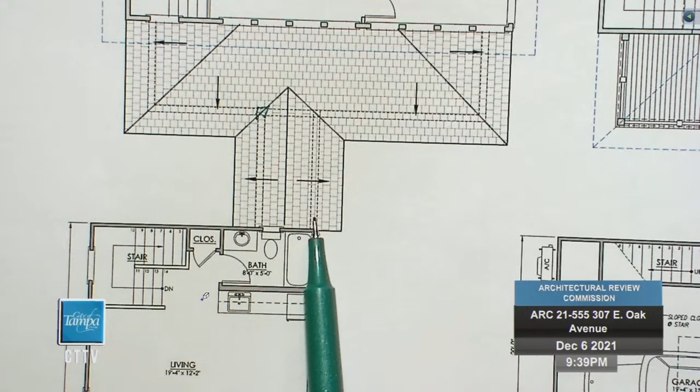So the simplest and cleanest detail, in my opinion, was just to take the porch beam that we have going around here. There's a column right here, and from that column this beam comes off, and then this beam comes back and ties into this beam. It lines with this corner right here, in elevation—you can kind of see how that looks there. There's the other side.

I'll go ahead and put the site plan back on.

So I don't think there's anyone here for public comment, right? There's someone hiding behind you. So we're going to go ahead and just close it and go to commissioners asking questions at this time. If anybody has any questions, please.

I do, sir. Again, with your connector, I understand how you're springing this small roof form off of the roof and its structure from the main dwelling. But I can't help but notice that there is, if you will, a piece of this connecting roof's eave that just terminates right there at the corner of the building. It's almost like it wants to continue over the doors, over the front of the—you might want to pull up that elevation.

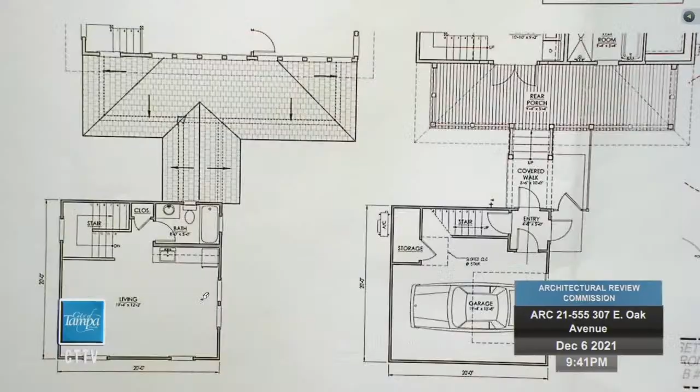You see how your trailing eave just dies? You're talking about right here, that corner? Right there. Yeah. And then take a look at your elevation where you have your garage doors—you have a man door at that location, and of course the garage door. Have you given any thought to continuing this to help break up this elevation?

No, I haven't, to be honest. But my biggest concern about the breezeway connector was the proportion and its height being so high. It does make sense because it's in alignment with the porch beam, but if you take it across to cover this door, I think proportionally it may be too high.

Let me ask my client a question, just real quick, if I may.

The breezeway is one of the things that my client wanted—that was part of the program. But if it's going to be a point of contention where we just can't get it to fit right with the architecture, we'd be okay removing that element. It's not that big of a deal to go six or eight feet in the rain.

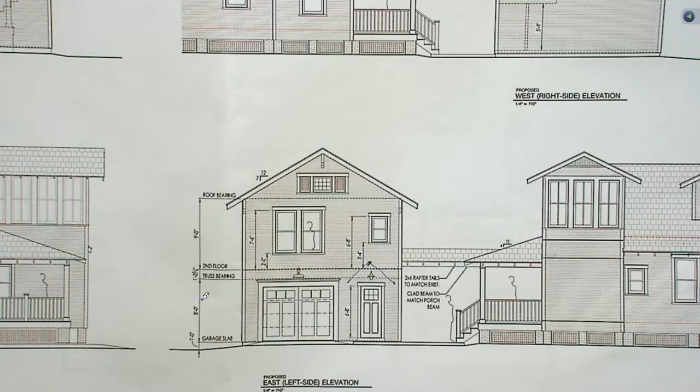I know we can't design that here, but if the board has concerns about the breezeway and how it fits with the architecture, we'd be okay removing it, and hopefully the board would be okay if we work with staff on providing a little shading or a bracketed roof cover over one of these doors or both.

Thank you. Any other questions?

Is the proposed height of this structure higher than the primary structure? That's a good question. I used 8 feet on the ground floor, and my client wanted 9 feet on the second floor, and we did the same roof slope as the house. So, to answer your question, it looks like it's slightly higher.

Although that would be hard to perceive, they'd probably look like they're about the same height. It's not higher than the sleeping porch roof. Are you saying that? Looks like it is to me.

Well, he didn't take the paper all the way up. But keep going, go on to the peak. Yeah, well I wanted to keep it parallel to that line. But yeah, it's very close.

The other thing to think about with the height is relative to proportion. So the proportion of this building is over 50% roof height to wall, whereas this is more wall with less roof. Do you have an elevation from the front that shows it?

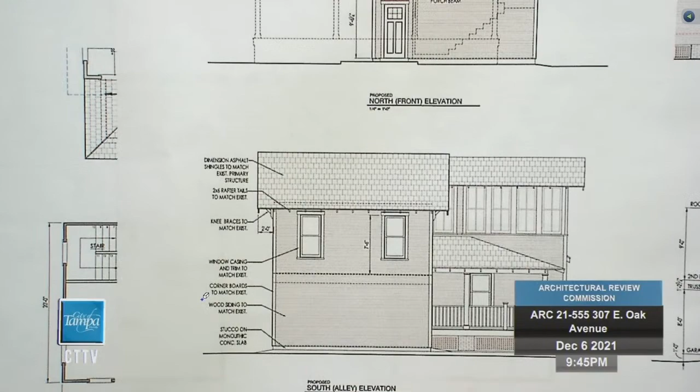Any other questions? That's really all I have. Anyone else with a question? No, not for me. Okay, I think we can close.

You have 5 minutes for a rebuttal. I always forget this stuff. I think we covered everything, so I'm good. Thank you. All right, thank you, sir. We'll go ahead and close the hearing and discuss the case.

I personally don't think the height differential is enough to make a stink about it, and I think you wouldn't even notice it from the front.

Don't know that you'll see it from the front, and clarify for me, the reason I asked was I know there's a height requirement that we may already be above. He has to go for the design variance exception. That's the main reason I was asking. So I don't think you'll see it from the street.

Now, the connector, great idea, but I think his windows get in the way. Well, not so much the window, but just catching that fascia along the side might be an idea for them to look into. And I'm not gonna hold their feet to the fire on that. I was thinking more along using it as part of the element that's already there to tie the whole thing together.